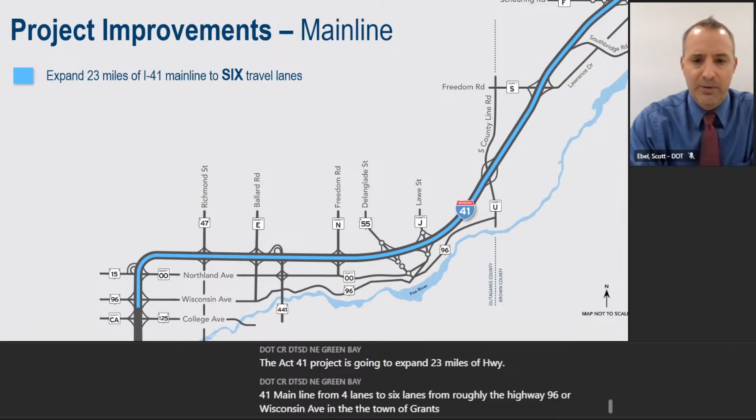I'll start by doing an overview of the I-41 project, of what's involved, and then continue into the updates. The I-41 project is going to expand 23 miles of I-41 main line from 4 lanes to 6 lanes, from roughly the Highway 96 or Wisconsin Avenue in the town of Grand Chute or City of Appleton area up through County Highway F or Scheuring Road in the town of Lawrence, City of De Pere area.

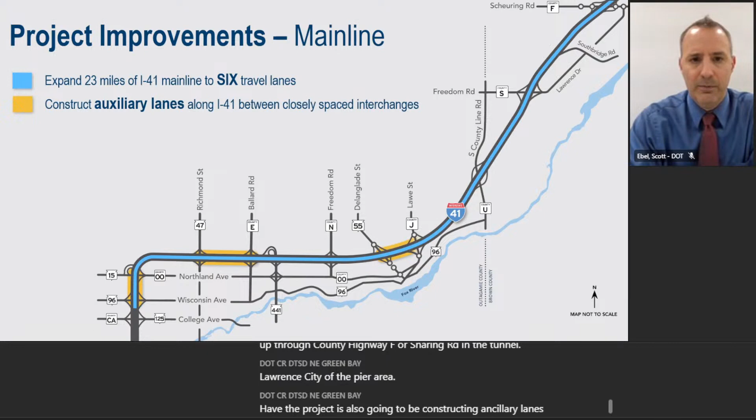The project is also going to be constructing auxiliary lanes along I-41 between most of the closely spaced interchanges that exist along the corridor. We'll also be constructing a collector distributor system of roadways between County E or Ballard Road and the 41-441 system interchange area.

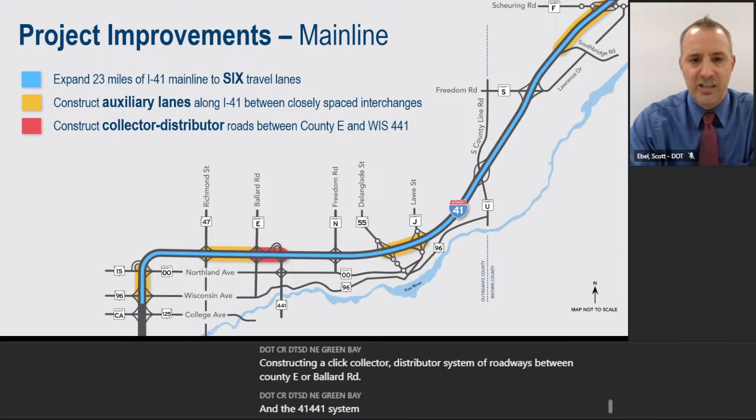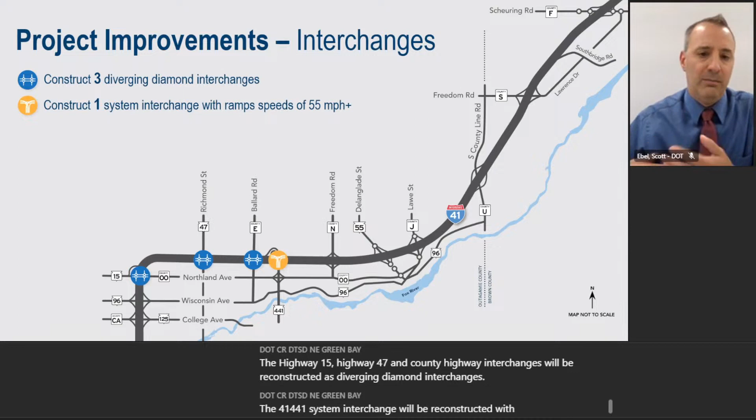The project will also be doing work at all of the interchanges along the corridor. As part of the project, most of these interchanges will be reconstructed. The Highway 15, Highway 47, and County Highway E interchanges will be reconstructed as diverging diamond interchanges. The 41-441 system interchange will be reconstructed with higher speed maneuver flyover type ramp movements.

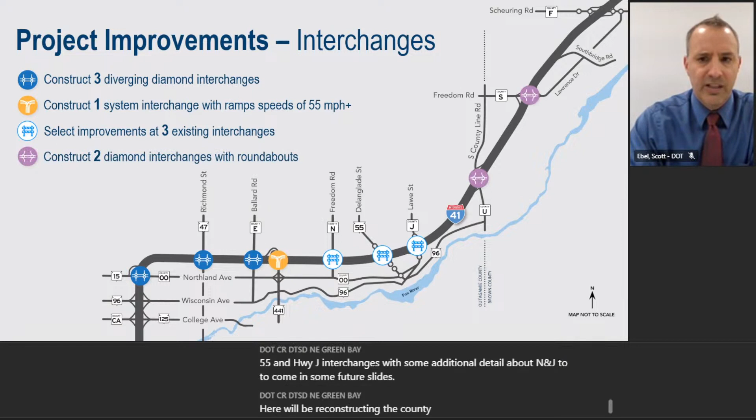We will be making a little bit more select improvements at the Highway N, Highway 55, and Highway J interchanges, with some additional detail about N and J to come in some future slides here. We'll be reconstructing the County U interchange and the County Highway S interchange as roundabout interchanges. And we will be constructing a brand new interchange near Southbridge Road in coordination with Brown County and their Southern Bridge Connection corridor.

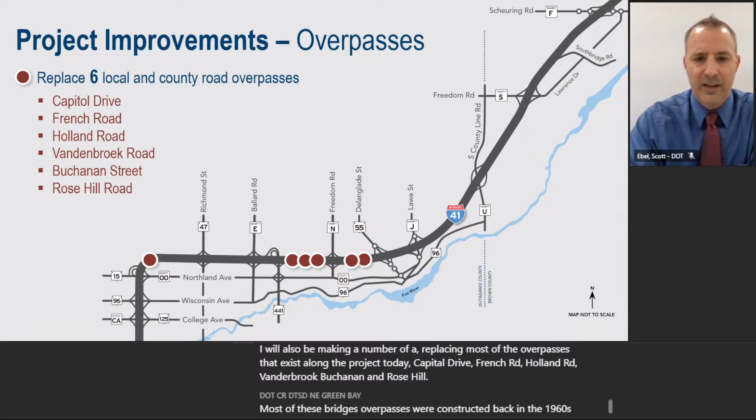We'll also be replacing most of the overpasses that exist along the project today: Capitol Drive, French Road, Holland Road, Vandenbroek, Buchanan, and Rose Hill. Most of these bridge overpasses were constructed back in the 1960s. They've got things like piers along the shoulders that we need to get out of the way in order to reconstruct the main line of the highway.

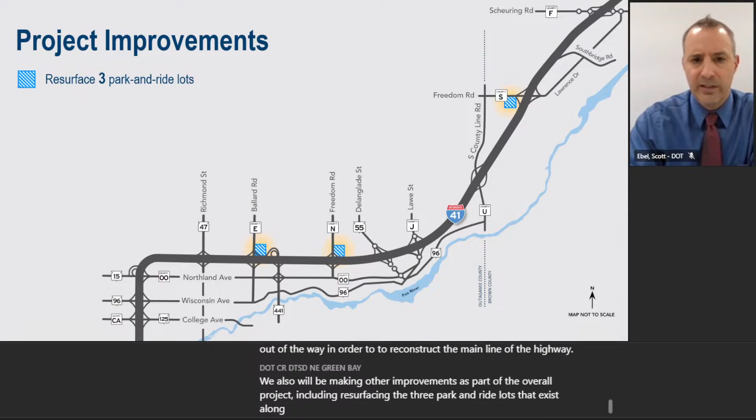We also will be making other improvements as part of the overall project, including resurfacing the 3 park and ride lots that exist along the corridor at County Highway E, County Highway N, and County Highway S, and constructing a new salt shed in the area of the Outagamie County Highway Department campus, near Holland Road and 441.

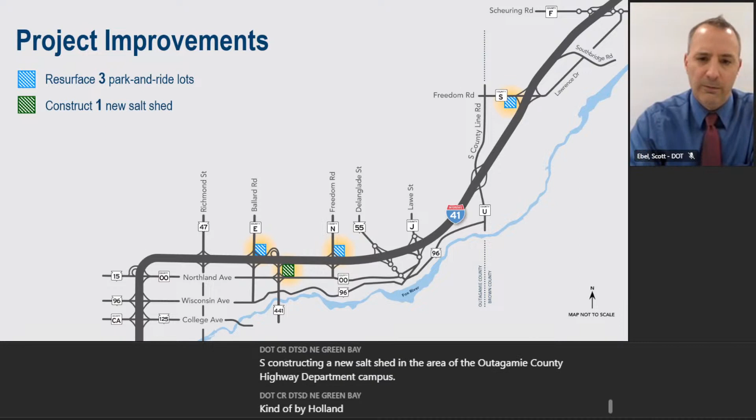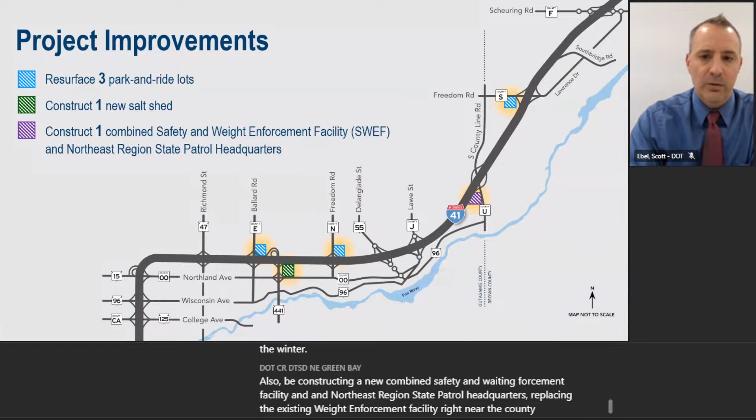Additional lanes of pavement, predominantly in Outagamie County, require additional salt capacity in order to treat during the winter. We'll also be constructing a new combined safety and weight enforcement facility and Northeast Region State Patrol headquarters, replacing the existing weight enforcement facility right near the County Highway U interchange.

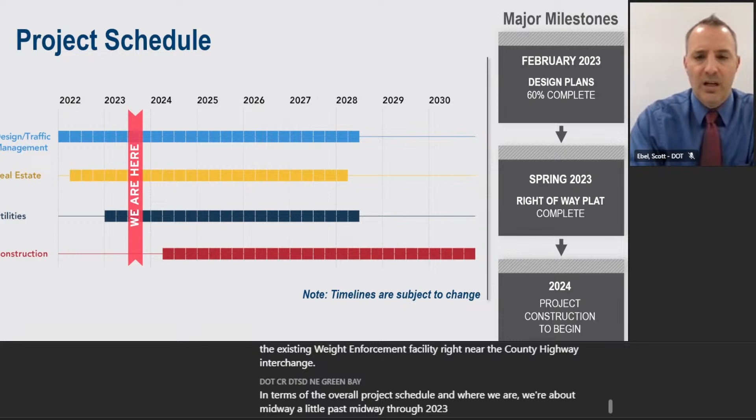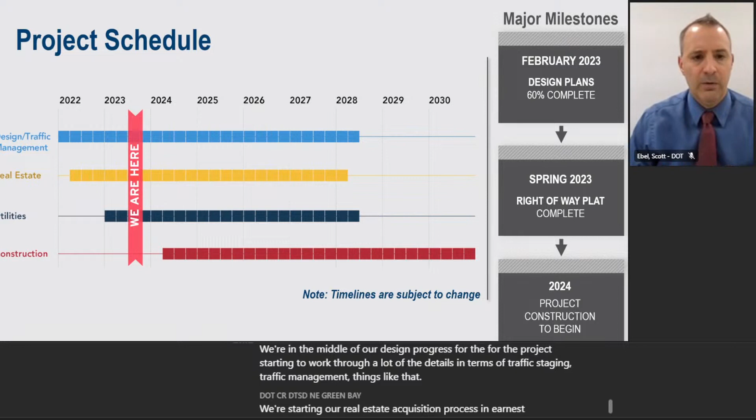In terms of the overall project schedule and where we are, we're about midway or a little past midway through 2023. We're in the middle of our design process for the project, starting to work through a lot of the details in terms of traffic staging and traffic management. We're starting our real estate acquisition process in earnest right now, and we've got utility coordination beginning for our earliest work. Construction is slated to begin in 2024, and I'll have additional detail on that in a future slide.

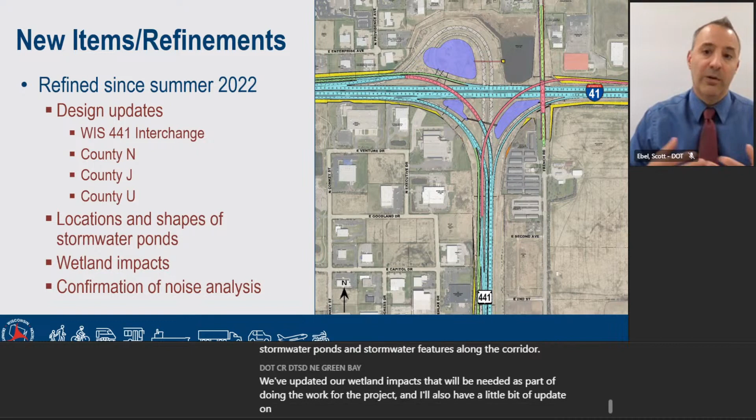I want to talk through some of the refinements and design changes made on the project since we were out here last summer. Since then, we've made some refinements to the 441-41 system interchange, added some additional work at the County N and County J interchanges, and made changes at the County U interchange. We've identified locations for most of our stormwater ponds and features along the corridor, updated our wetland impact estimates, and I'll also have a bit of an update on our noise analysis since last year's meeting.

At the 441 system interchange, we've made updates to lower costs and reduce right-of-way impacts by eliminating a bridge, eliminating or lowering some retaining walls, and eliminating some larger fills that were part of the original layout presented last year. Mostly this was done by eliminating a braided ramp configuration along southbound 441.

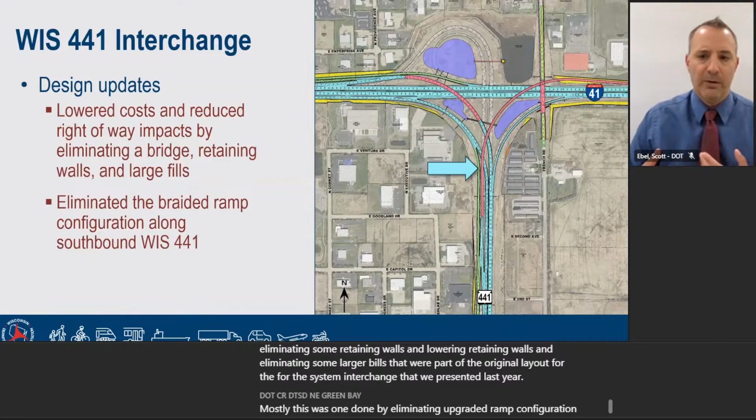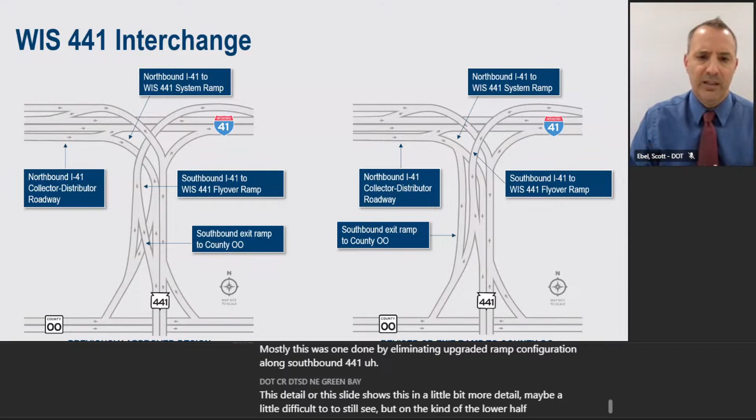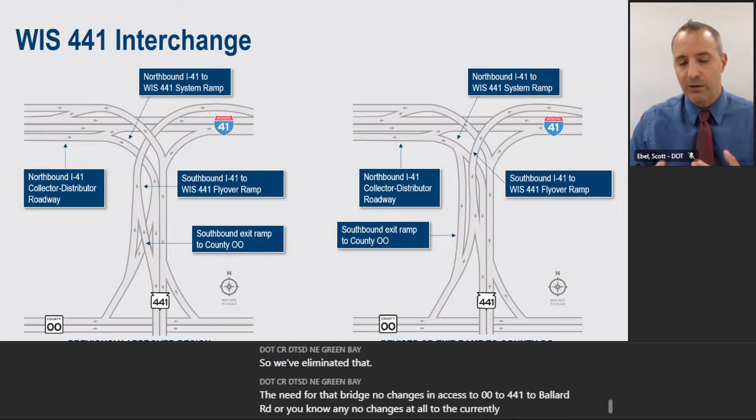This slide shows it in a bit more detail. On the lower half of the screen, where we have the southbound exit ramp to County OO, the previously shown design had a crisscrossing of ramps between the access to OO and the access to 441. We no longer need that crisscross based on other changes we were able to make, so we've eliminated the need for that bridge. There are no changes in access to OO, 441, or Ballard Road, and no changes to the currently existing local access as part of this change — it's really just a cost-saving feature.

We've also made updates to the plans for County Highway N to help future-proof and address future operations through that interchange area. This includes adding dual left turn lanes for the exit ramps from 41 onto County Highway N, and additional left turn capacity along County Highway N itself, including across the bridge. There will be some bridge rehab work and an increase in pavement area. Since we're touching a number of areas for that work, we're going to replace the existing pavement in that section so we don't end up with a pavement maintenance nightmare from mismatched vintages in the future.

A similar change is happening at County Highway J, where we're making improvements to increase the capacity of the roundabouts out there today to handle the oversized, overweight, larger freight vehicles that regularly travel this corridor. We're also making a few grade changes, which will result in new pavement being constructed as part of the project.

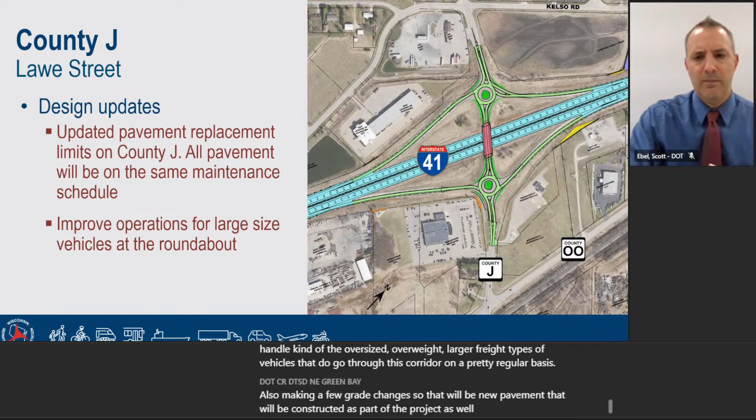We've also identified additional stormwater ponds since our initial environmental phase of the project, now identifying up to 22 stormwater pond locations based on additional design work and drainage patterns, in order to meet the stormwater quality standards required for our permitting with the Wisconsin DNR. Some of these ponds may end up being eliminated, but we don't anticipate needing more than 22. We're continuing to work through details on the exact locations and configurations of the ponds with the Wisconsin DNR.

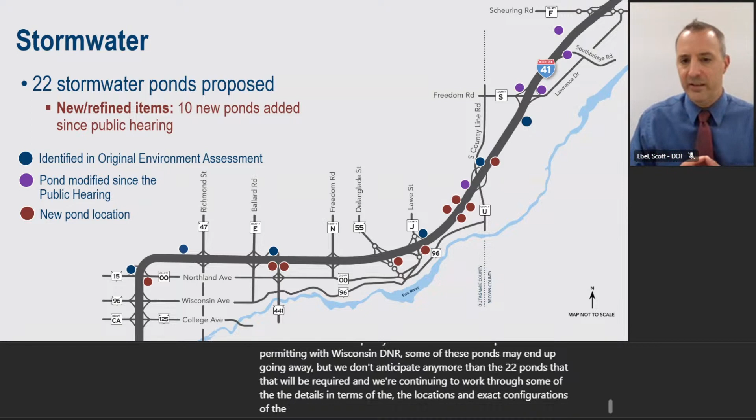We've also made some updates to our anticipated wetlands that would be impacted as part of the project. During the environmental phase, we'd identified 37 acres of permanent impact and 14 acres of temporary impact. Based on design updates, we now anticipate up to 76 acres of permanent impact with 7.5 acres of temporary impact. We are working with Wisconsin DNR and Army Corps of Engineers to try to minimize these impacts as best as we can.

A lot of these impacts are related to changes in ditch grades throughout the corridor that we've made, just trying to get the water to flow where it needs to go. Some have been for stormwater treatment and water quality standards, trying to meet that with our stormwater ponds. And also some are due to improvements for safety and traffic operations at crossroads and interchanges, or small amounts of additional work we're doing at some underpass locations with local design coordination.

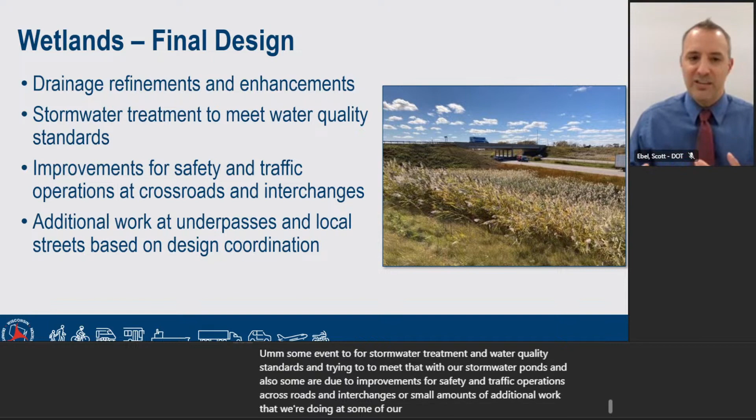This is a little bit of a snapshot of the 15 interchange, previous design versus the current or updated design, just to give a flavor of the types of changes to wetland impacts we're discussing here. Based on other design constraints, we needed to move the stormwater pond location, which resulted in some additional impacts. We identified the need for an additional pond, which resulted in some additional impacts. There were also additional ditch grading impacts that were originally anticipated to be temporary, but were later confirmed to need to be permanent, mostly based on a change in grade.

An existing ditch that gets impacted, or existing wetland ditch that gets impacted and goes back in at that same elevation, may not be a permanent impact. But oftentimes if we need to raise the elevation of that ditch in order to get water to flow where we need it to go for treatment or other things, that will result in a permanent impact.

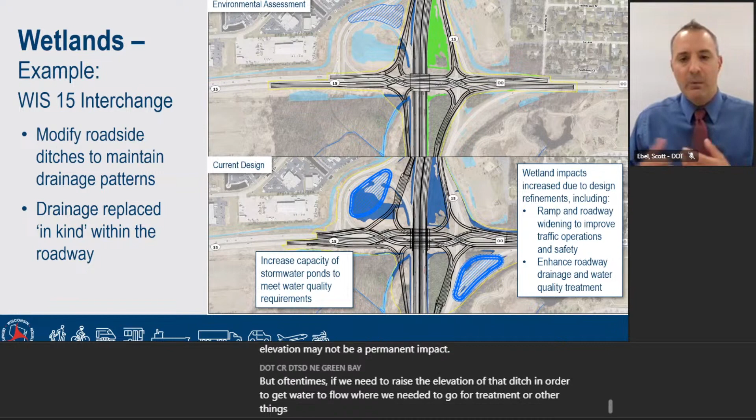Also, a little bit of an update on our noise analysis. We're currently completing a confirmation of the noise analysis that was done during the environmental assessment phase, optimizing the details of the barriers, making minor adjustments to accommodate specific site conditions, evaluating options for cost efficiency, things like that. And also just updates from the design overall has had minor changes, so we wanted to make sure that's all up to date.

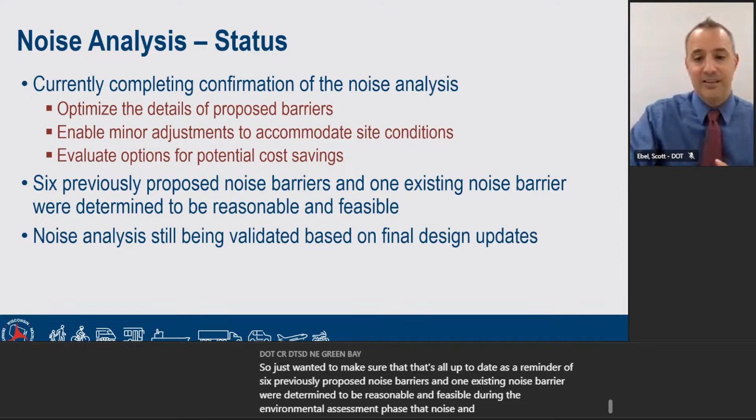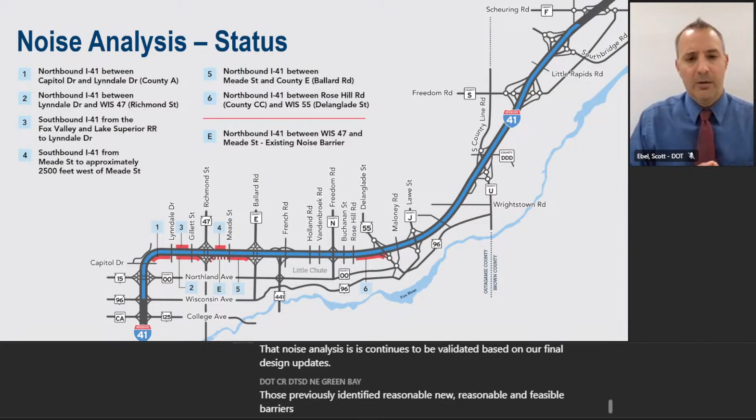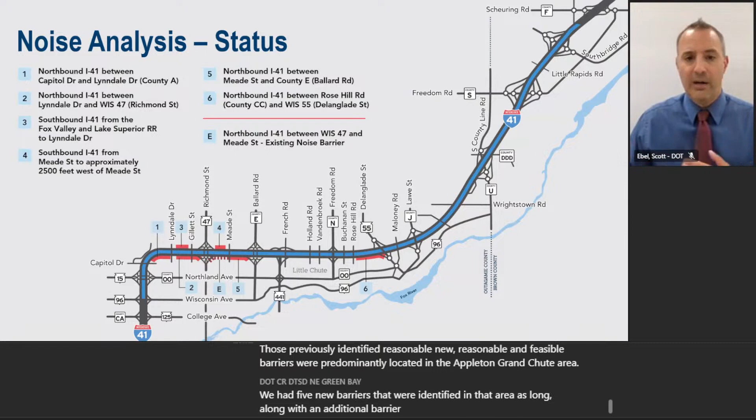As a reminder, 6 previously proposed noise barriers and 1 existing noise barrier were determined to be reasonable and feasible during the environmental assessment phase. That noise analysis continues to be validated based on our final design updates. Those previously identified new reasonable and feasible barriers were predominantly located in the Appleton and Grand Chute area. We had 5 new barriers identified in that area, along with an additional barrier closer to Highway 55 on the south side of 41.

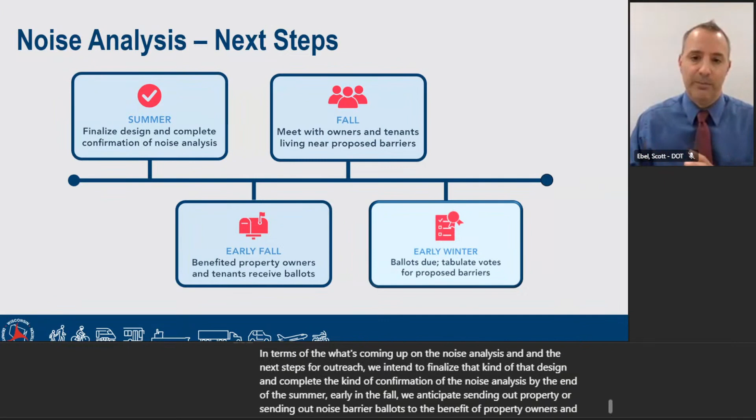In terms of what's coming up on the noise analysis and the next steps for outreach, we intend to finalize that design and complete the confirmation of the noise analysis by the end of the summer. Early in the fall, we anticipate sending out noise barrier ballots to the benefited property owners and receptors in the area in order to vote on and confirm whether or not they want the barrier to be constructed as part of the project.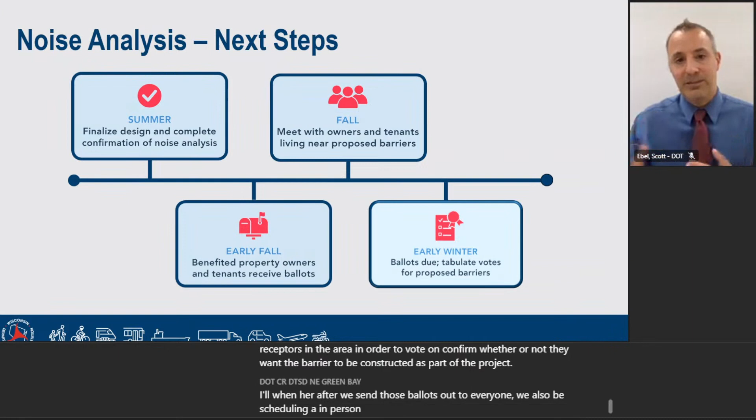When or after we send those ballots out to everyone, we'll also be scheduling in-person meetings to go through the ballot information and the updated noise analysis results, really walk through that in more detail. Then early in the winter, we anticipate the ballots being due, tabulating the votes for the proposed barriers before they can be 100% included as part of the project.

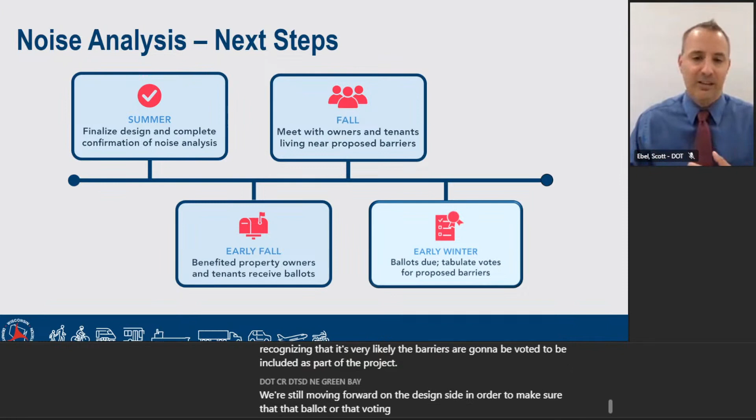Recognizing that it's very likely these barriers are going to be voted to be included as part of the project, we're still moving forward on the design side to make sure that ballot or voting process isn't going to be any kind of hold up. But that voting process is required as part of our noise policy.

We also have additional noise resources available on the project website. Encourage you to go out and look at that as you're able. This is an area of the website that, as we move through that voting process, we will continue to update with new information.

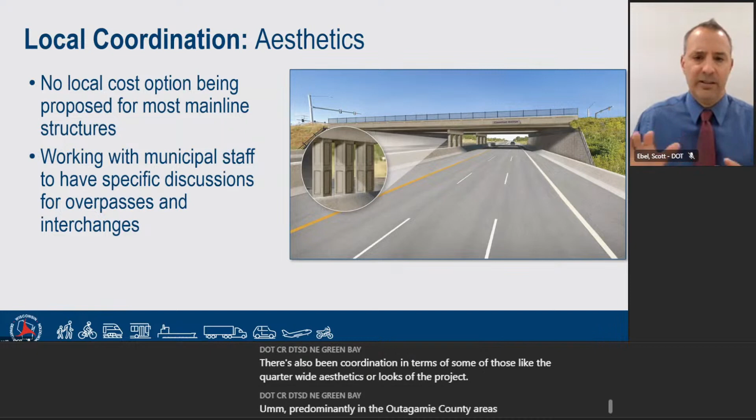There's also been coordination in terms of some of the corridor-wide aesthetics or looks of the project, predominantly in the Outagamie County areas, but also extending a little bit into the Brown County area. We've been working with various municipal staff in order to come up with a no local cost option to be used for most of our mainline overpass structures.

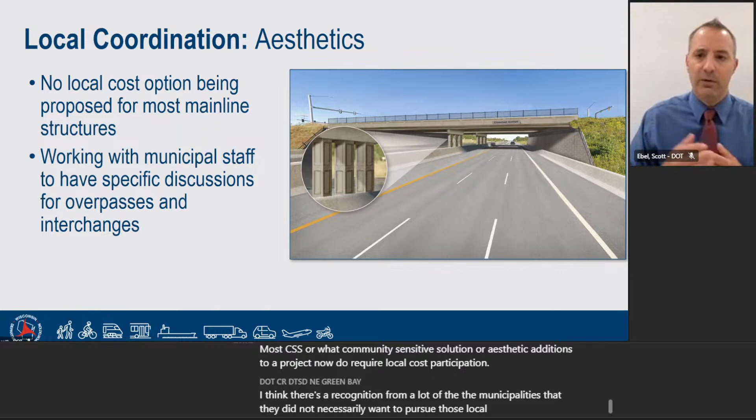There's a rendering of that on the screen right now. I want to stress this is something that will involve no local cost. Most CSS, or community sensitive solution, or aesthetic additions to a project now do require local cost participation. I think there's a recognition from a lot of the municipalities that they did not necessarily want to pursue those local costs for most of the project or most of the locations along the corridor.

We do have one set of bridges at the South Connector interchange. This would be the new interchange constructed just south of Scheuring Road in the De Pere Lawrence areas. This bridge is very close to the previous US 41 project, so the community wanted an aesthetic similar to that previous work, so there's a slightly different look here for this bridge, which is being done with local cost participation.

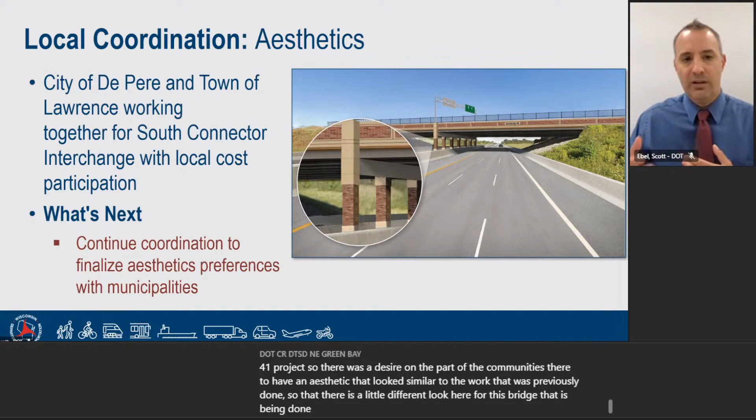On the stormwater side, we're adding a number of additional ponds as part of the project. We continue to coordinate with municipalities on our drainage designs and ponds, and in a number of locations we're proposing a new pond where municipal water would also be flowing through. Oftentimes these ponds are an opportunity for joint benefit, both for our permitting and for that municipality's permitting with the Wisconsin DNR and their stormwater requirements.

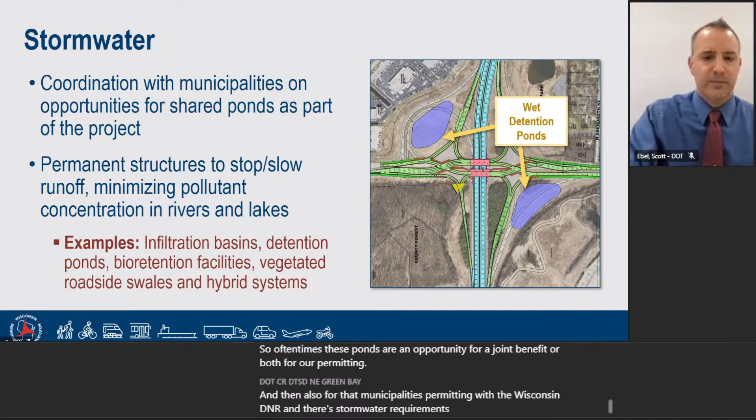Our real estate process is continuing in earnest. Early buyouts were completed as part of the environmental phase of the project. The right-of-way plats are complete in some locations, and others will be completed through the end of summer and into fall. We've got approximately 300 parcels being impacted as part of the project, and that acquisition process is really starting to kick up.

We've got appraisals that have been in the works. Some property owners along the corridor have already been contacted with appraisal information, and we may start to see offers come to them very soon. But this is also a process that's going to take a couple of years to entirely play out, just because of the large number of parcels required.

Construction will kind of lead, and it won't all start right away - it'll be a year by year thing. So the real estate will kind of follow suit. It'll be a couple year process to get all the real estate acquired for the project.

Transportation management planning involves coordinating those traffic impacts with stakeholders along the corridor, including local road operations, county highway, local planning and public works departments, transit, bike and pedestrian outreach, county parks, school districts, chambers of commerce, area schools, and busing. We want to coordinate the impacts of the traffic we expect throughout construction with these area stakeholders.

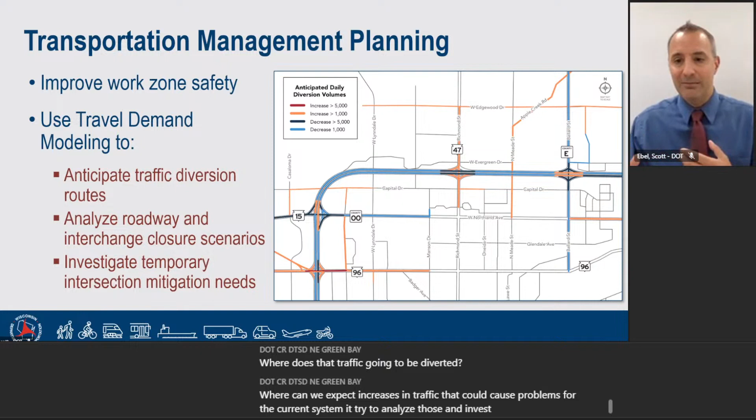One of the tools we use is our travel demand model, basically a model of all the traffic in the area that we can use to analyze scenarios - say, if we need to shut down the 47 interchange, where is that traffic going to be diverted, and can we expect increases in traffic that could cause problems for the current system? We try to analyze those and investigate any need for temporary mitigation.

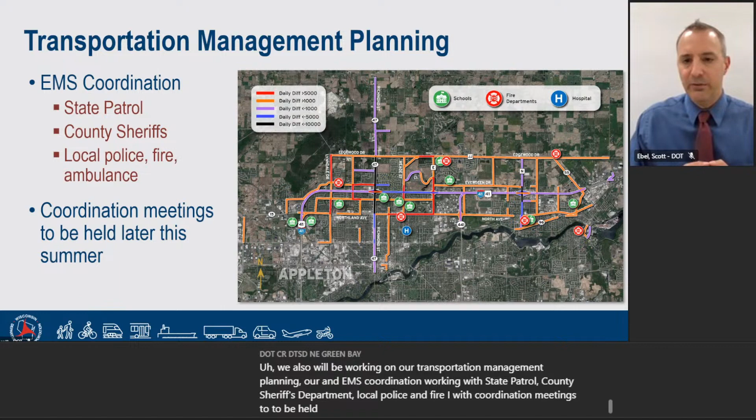We'll also be working on transportation management planning and EMS coordination, working with State Patrol, County Sheriff's Department, and local police and fire, with coordination meetings to be held with those groups prior to construction, and especially leading into construction with incident management for the project. We'll be organizing incident responder stakeholder meetings during construction.

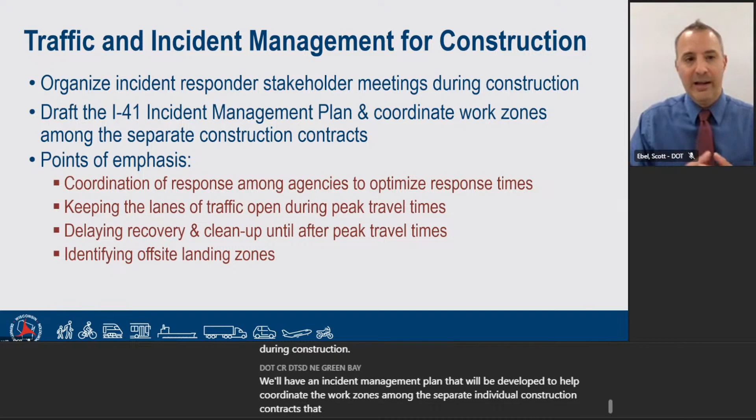We'll have an incident management plan developed to help coordinate the work zones among the separate individual construction contracts going on, with points of emphasis to coordinate response among the agencies to optimize response times and keep lanes of traffic open, especially during peak travel times. When there's an incident, it's to everyone's benefit to clear that work zone as quickly as possible, with additional cleanup happening during off-peak travel times when there's less traffic, because it's really about preventing secondary or tertiary incidents and helping everybody move through the corridor safely.

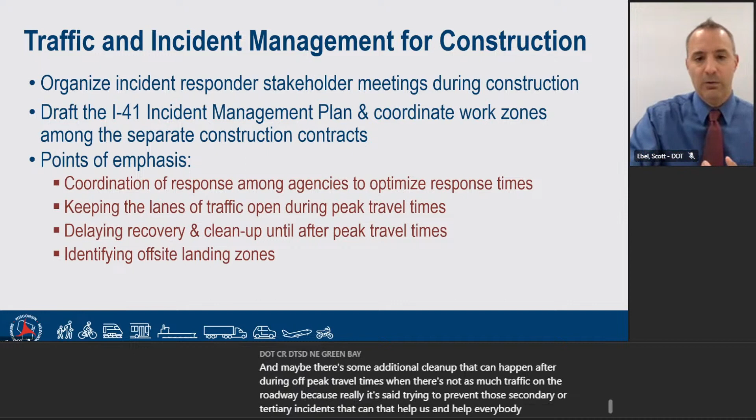That incident responder effort is going to continue this fall, leading up into construction. Once construction starts, there will be regular after-action reviews, monthly responder meetings, and incident management plan updates as needed.

Other activities that will be going on through 2023: ongoing design, ongoing field work, investigations, soil borings taking place right now. Many of you may have seen drums along the median of I-41. Notice the median has recently been mowed. We're doing soil borings in the median this summer to characterize the material that's there. Also doing additional archaeological work, mostly completed already this year, and routine survey updates, utility survey updates, things like that.

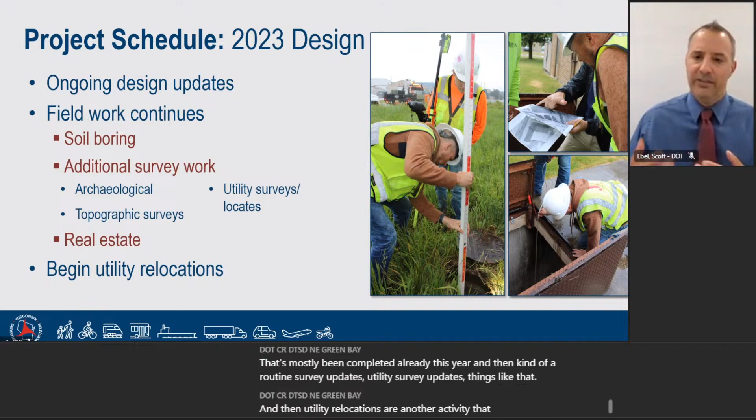And then utility relocations are another activity we anticipate to start later this year.

Looking ahead to our 2024 priority projects, you'll start to see our focus shift. Next year we're going to let a project for Capitol Drive and the 15 interchange, one of the earliest priorities. Also Rose Hill Road, or County Highway CC, the bridge along I-41 that was struck last year around August, which has had a lane restriction or lane tightening up on top. So we want to get to that bridge as quickly as we can once construction starts.

Later in 2024, the County Highway N interchange will become a priority, and the early fill and Southbridge connector frontage road project, to lay the foundation for the new Southbridge interchange, will be the next priority. Also replacing the weight enforcement facility and constructing the new Northeast Region State Patrol headquarters. These are the projects we anticipate for 2024.

The Capitol Drive overpass and Rose Hill Road overpass are anticipated to take place mostly in spring, early summer. The Highway 15/OO interchange work could potentially start later into 2024, but we expect that to mostly go into 2025. The County N interchange is anticipated for later in the summer and fall of 2024, and the Southbridge early fill contract work for 2024 through 2025. The weight enforcement facility we anticipate will be a 2-year project, constructing both the building and the new pavement area around it.

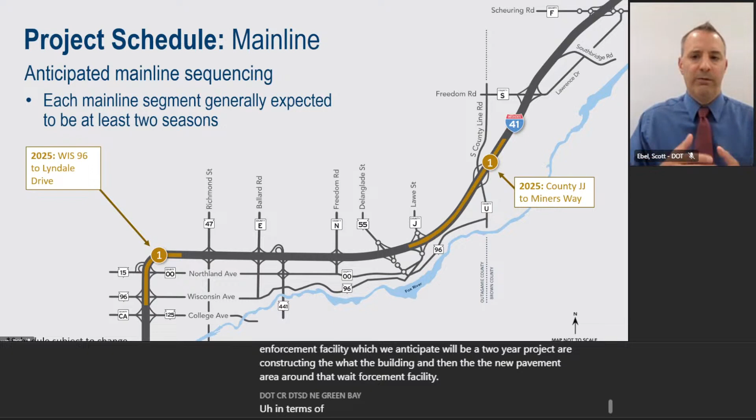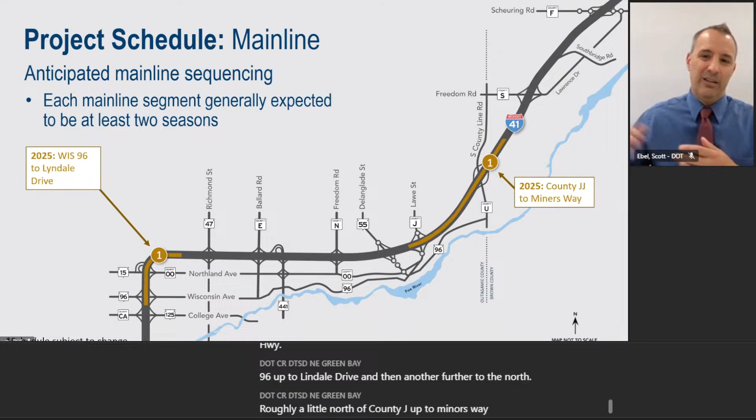In terms of overall mainline highway work, we don't expect that to commence until 2025. The current plan is to start 2 segments of mainline: one furthest south from roughly Highway 96 up to Lyndale Drive, and another further north from roughly a little north of County JJ up to Miners Way, including the area in front of the weight enforcement facility at County Highway U.

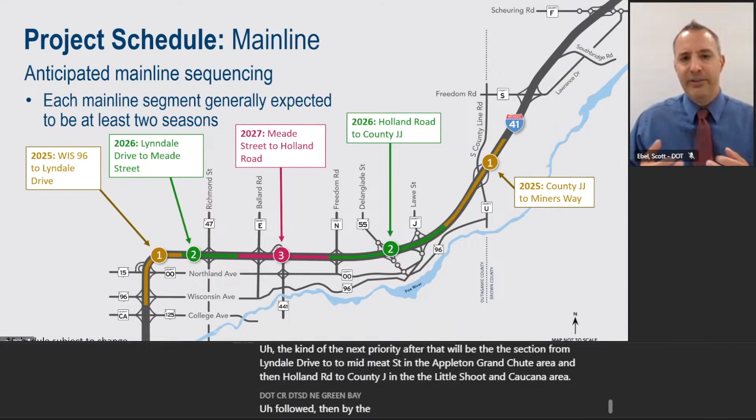The next priority after that will be the section from Lyndale Drive to Meade Street in the Appleton Grand Chute area, and Holland Road to County JJ in the Little Chute and Kaukauna area. Followed by the Meade Street to Holland Road area, which also contains the 441 system interchange -- we expect that to be at least a 2 or 3 year window of construction. And then lastly, from Miners Way up to County Highway F.

This is subject to change. We may break some of these pieces into smaller pieces of work earlier. Also want to stress that all of these mainline contracts are going to be multi-year projects, at least 2 seasons of work. We're not going to totally finish the work from 96 to Lyndale before we start Lyndale to Meade. There's going to be overlapping work where you'll see work happening on multiple projects at the same time.

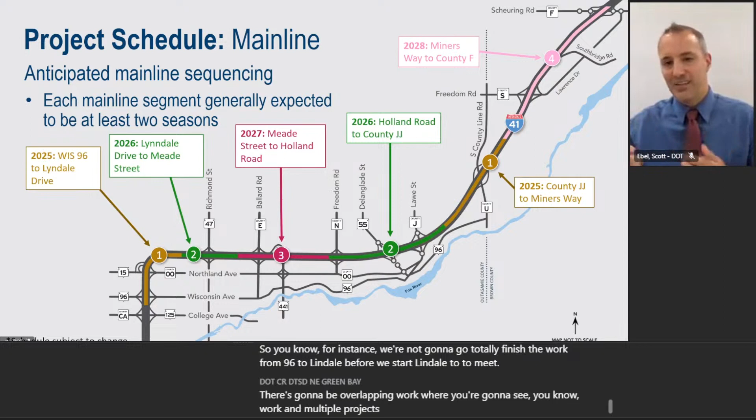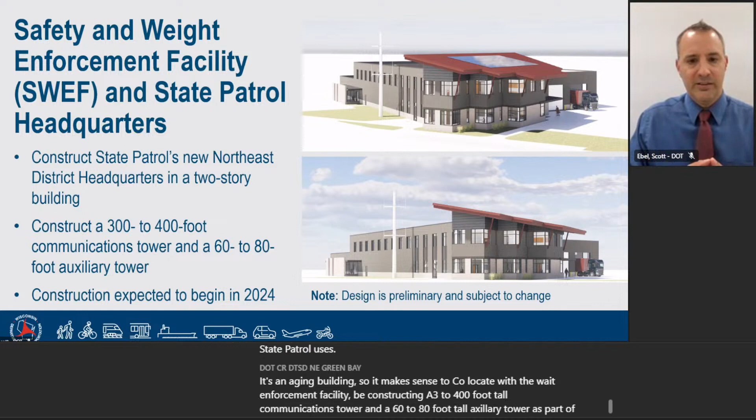The weight enforcement facility and new State Patrol headquarters will be replacing the existing Fond du Lac Post facility that State Patrol uses. It's an aging building, so it makes sense to co-locate with the weight enforcement facility. We'll be constructing a 300 to 400 foot tall communications tower and a 60 to 80 foot tall auxiliary tower as part of this project, expected to begin in 2024 as well.

Some other department work taking place in 2023 and 2024: this year we've got a bridge preventative maintenance project along 441, as well as a pavement rehabilitation project doing concrete repair work along 441 between US 10 and 41, near the north junction with 41. We also have a bridge replacement project along Highway 125, or College Avenue, between I-41 and Bluemound, and a County OO improvement project, a local program project, along County Highway OO between 441 and French Road.

In 2024, there'll also be adjacent work to the 41 project along I-41 further south between Breezewood Lane and Highway 15, as well as some work along 96 from Claribel Street to County JJ doing resurfacing, and some utility relocation work from Bluemound Road to Badger Avenue, again along Highway 96 or Wisconsin Avenue, in anticipation of a department project to be done in 2026.

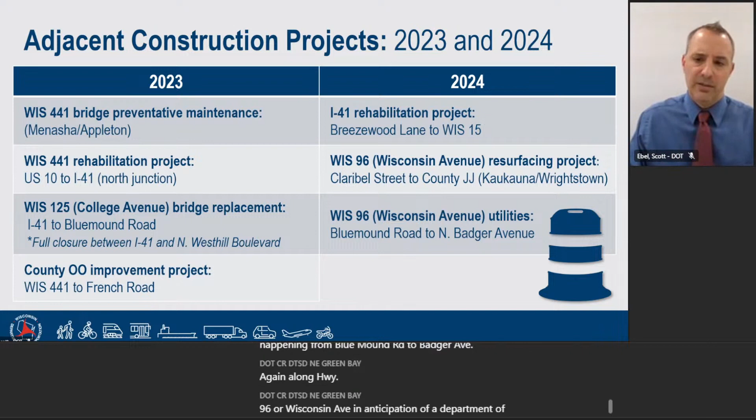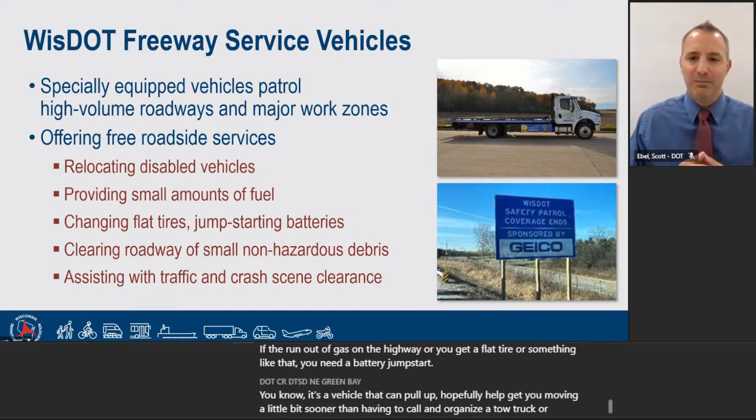We also have our freeway service vehicles roaming the project area right now. These are vehicles sponsored by Geico—basically tow trucks especially equipped to help clear the roadway as quickly as possible. If you run out of gas on the highway, get a flat tire, or need a battery jump start, this vehicle can pull up and hopefully get you moving sooner than having to call and organize a tow truck. We try to get you off the roadway as quickly as possible to prevent those secondary incidents that can happen even when there's just a routine car pulled over on the side of the road.

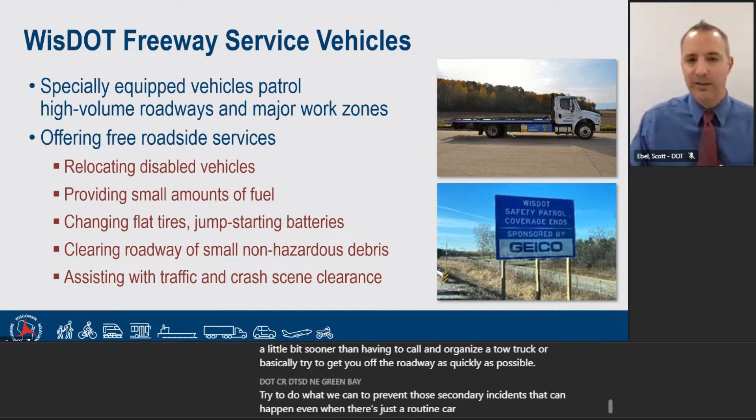We also plan to continue our outreach. We want to be the most trustworthy and credible source of information about the project to the communities, and make sure we're seeking your input at project milestones and throughout the life of the project.

We want to keep you informed through social media on Facebook or Twitter, or through the project website. We definitely encourage everyone to visit the project website—it's got a very nice, clean user interface compared to the more standard project websites you may have seen on other projects. There's a lot of great information about the project there, and you can submit any comments or questions you have. We'll try to get back to you within a few days of any questions submitted. You can also sign up for project emails if you're not already on our email invite list.

We also have business outreach that we're going to start kicking up this fall, ahead of some of our bigger impacts next year with the overpass work at Capitol and CC, and especially at County Highway N, which will be our first interchange closure. We're trying to identify specific business needs, since we know businesses in particular can be heavily affected when we start to close roads and interchanges. We don't want to sugarcoat that there will be effects, but we want to work with businesses to help manage those impacts as best we can. We have a 'we're in this together' business coordination website we encourage businesses to visit for tips, tools, and resources during construction. As construction starts, project staff will help businesses answer questions about what's coming in terms of traffic impacts, and where temporary signs can be placed to help inform customers about access to businesses.

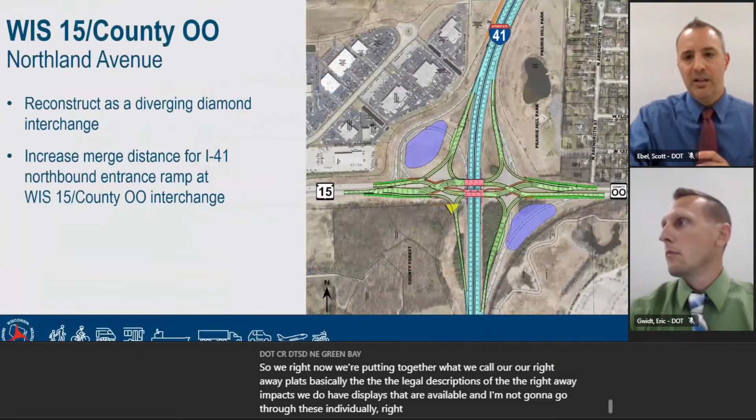Right now we're putting together what we call our right-of-way plats, basically the legal descriptions of the right-of-way impacts. We do have displays available—I'm not going to go through these individually right now, but we do have real estate impacts that are part of the project available. These displays will be put up on our project website that can be viewed by anyone who jumps onto the website to take a look.

At the more granular level, we're putting together these right-of-way plats, identifying all the specific parcel impacts, and where we have these impacts, Wisconsin DOT or consultants hired by Wisconsin DOT will be contacting property owners to go through the process of appraising that impact, what that is, and then getting an offer for that impacted parcel. So there is a very large effort related to the real estate impacts and working with impacted property owners through that real estate acquisition process.

If you have specific questions about the real estate process, I definitely encourage you to attend the in-person meetings we have either tomorrow or Thursday. We will have dedicated real estate staff at those meetings who can answer a lot of the specific questions about the real estate process, or follow up with us after the meeting tonight, and we can have somebody get in touch with you.

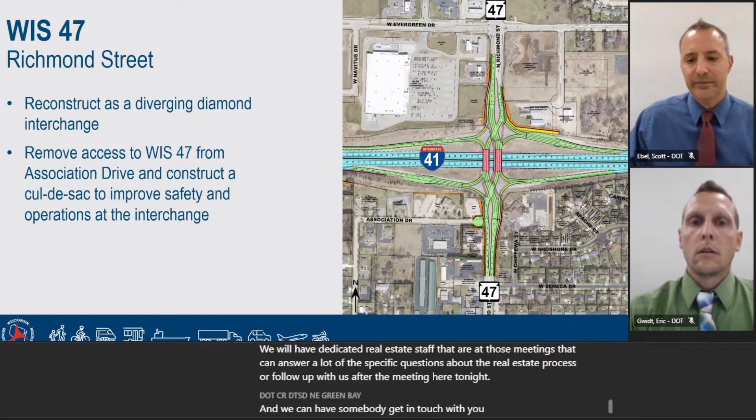Next question: at what point in the project will the noise barriers be put in place? As I said, we need to go through this voting process to confirm that the noise barriers are wanted by the neighborhoods that would be benefiting. Anticipating that the neighborhoods are all going to vote for the barriers to be put in place, they will be constructed as part of the overall roadway work.

Typically, how we'll be constructing the main line of 41 is flip traffic over to one side of the roadway, construct the other side, and then flip traffic back and construct that side. So basically when one side of the roadway is down for construction, that's when we'd typically anticipate the noise barriers to be constructed as part of that same closure. You don't have traffic on that side, so the contractor can get in there and do that work a lot easier. We typically just include that as part of the roadway work.

Who is covering the cost of the noise barriers? The cost of the noise barriers is just covered as part of the overall project costs, no different than any other roadway or bridge cost as part of the project.

Next question, what exactly is happening with the Capitol Drive Bridge, and how will the elevation change into Rifle Range Road? Thanks for the info and very informative.

Sure, I can answer that real quickly. We will have a display up on the website that shows Capitol Drive, but the Capitol Drive Bridge will be replaced. It will need to get longer because I-41 underneath is going to be wider, with additional lanes underneath. Because it's getting longer, it also needs to get a little bit higher, so there will be some raising of Capitol Drive on the approach to the bridge.

We are otherwise not planning to change the access to Rifle Range Road from Capitol Drive. That intersection will basically be very similar to what it is today. When the project is done, it will just be a little bit higher.

I think we kind of answered this one, but what is the timeline for the new sound barriers? Maybe just looking for a year or timeline.

Sure, yeah. So the time frame for the noise barriers is really going to be when that section of mainline 41 is also being worked on. As I said, that first priority for mainline is going to be that work from 96 to Lindale. That section north of Capitol Drive on the northbound direction will have a new noise barrier, so you would see that being constructed as part of that project. And as we go along mainline, wherever we have that noise barrier, it will be part of that mainline work.

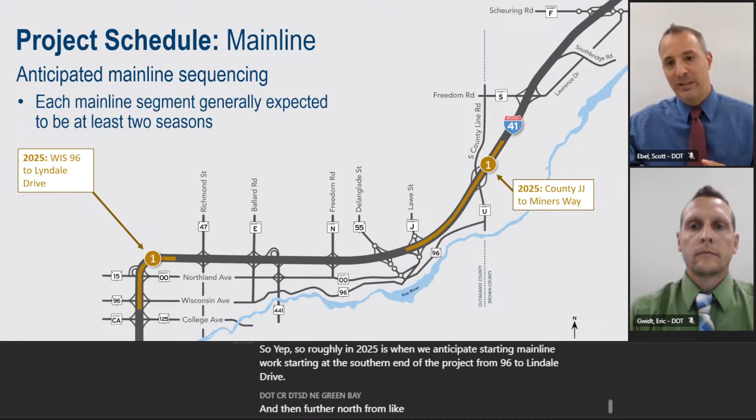Roughly in 2025 is when we anticipate starting mainline work, starting at the southern end of the project from 96 to Lindale Drive, and then further north from a little bit north of County J, roughly around County JJ, up to Miners Way.

Next question: will 41 ever be shut down for bridge overpass installations, etc.? And if so, how long — overnight, several hours? So just kind of how long do we think stuff like that would be?

There will need to be, in most cases, directional closures for things like bridge demolition, setting girders, and similar work. Sometimes we do have to have very temporary shutdowns of 41. A lot of that isn't going to be work we're doing during the day at all. During the day, we're pretty well committed to maintaining two lanes of traffic in each direction through peak hours. This work would be happening overnight or over a weekend. Recognizing how important and how much volume of traffic uses 41, we try to limit the need to close 41 itself, to the extent that we can.

There are a few questions in here that are property specific, and we'll reach out to those people individually to answer those at a smaller scale. So I'll skip to a couple other questions here.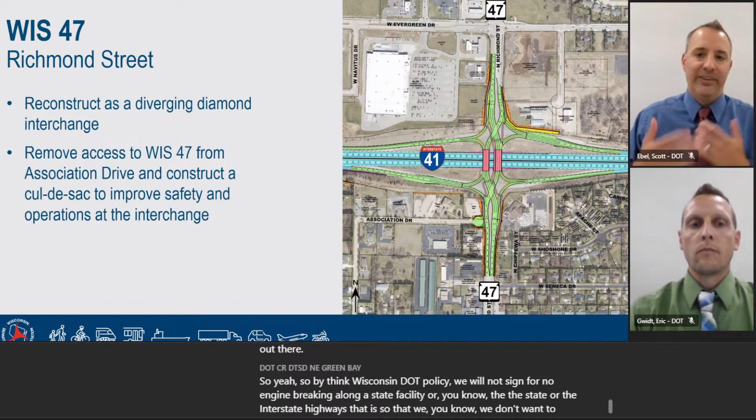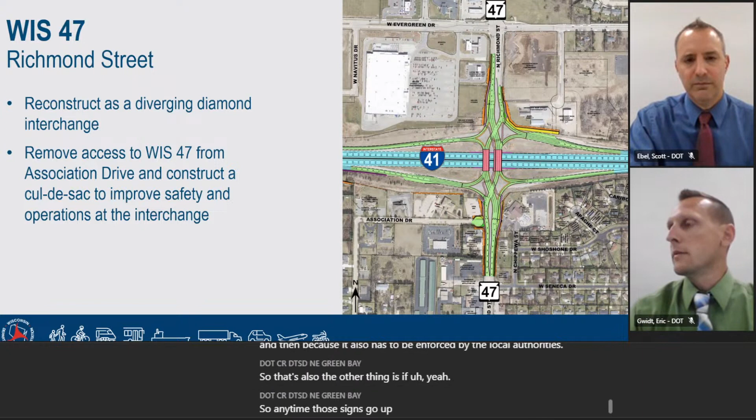Can engine braking be restricted in emergency situations to reduce noise? Not sure if this is where to ask the question, but thought I'd throw it out there. By Wisconsin DOT policy, we will not sign for no engine braking along a state facility or interstate highways. That is so we don't want to be the culpable partner if there's an incident and a truck does not engine brake—I think that's the reason for the policy. But that is the policy: we will not sign or do no-engine-braking signage along a state facility. It has to be passed by the local authorities, and it also has to be enforced by the local authorities. So anytime those signs go up, it has to go through those different avenues. But interstates and similar roads are exempt from that.

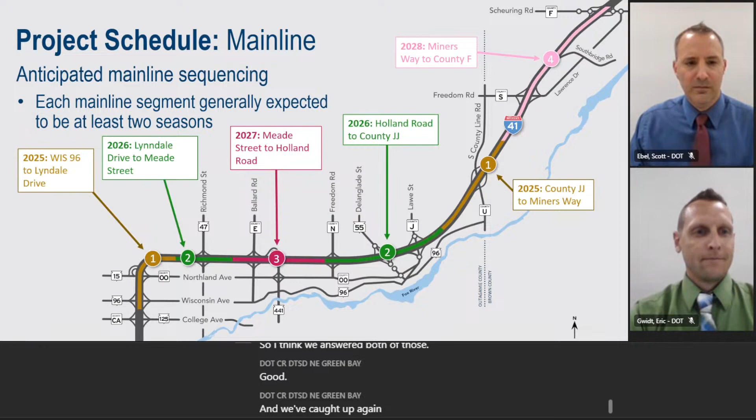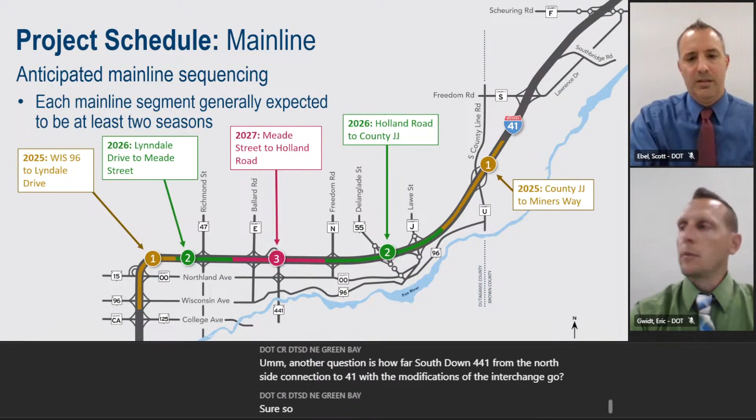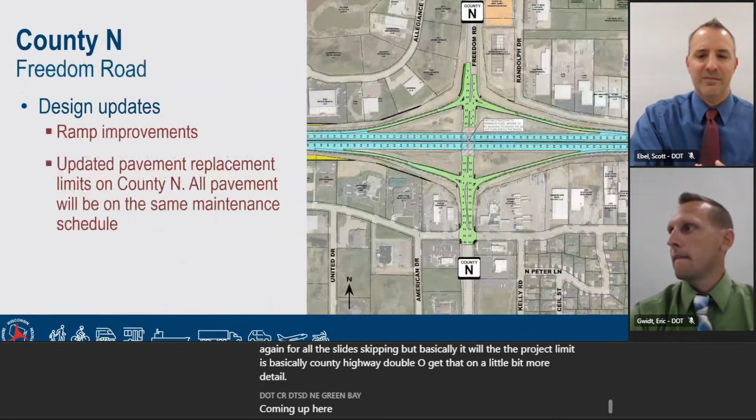Another question is, how far south down 441 from the north side connection to 41 will the modifications of the interchange go? Basically, the project limit is County Highway OO. We won't be doing any work along County Highway OO itself as part of the project, but we will be reconstructing the ramps on the north side of the interchange. We'll also be doing a little bit of bridge widening on the southbound bridge over OO, and a little bit of widening further south. But for the most part, County OO is the limit we're not doing much work beyond.

We don't have any new comments coming in.

There's one new response about the pedestrian bridge, saying they're glad it's not going away since their dogs use the bridge often. Thank you, yep.

Another one coming, I think.

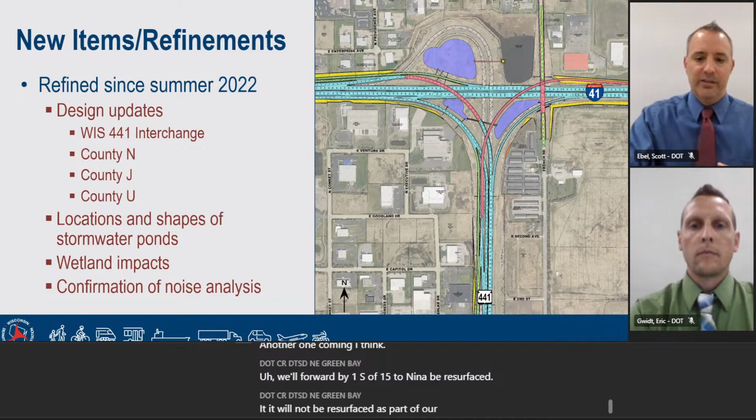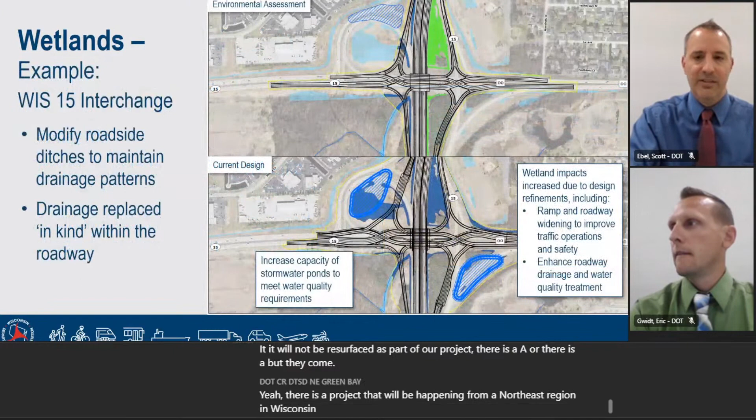Will 41 south of 15 to Neenah be resurfaced? It will not be resurfaced as part of our project. There is a project from the Northeast Region Wisconsin DOT that will be happening. It'll be a rehab project with bump repairs and bridge rehabs next year. That rehab work would go from roughly Breezewood Lane up to Highway 15, occurring in 2024. It's a pretty big job, but it's not associated under this 41 project umbrella—it's a separate DOT region project. It'll improve the pavement that's out there today, but won't involve any new reconstruction type of activity.

What is the plan for Rose Hill Bridge, height and lane width? Will there be a noise barrier? Let's answer that first one first. Rose Hill Road is being reconstructed. It's currently a 2-lane roadway and will remain a 2-lane roadway. There will be additional width on the bridge over I-41.

This extra width is to accommodate pedestrian or bike access that could connect to it in the future—we don't want that to be a choke point. It will be a transitional urban section through the approaches, constructing curb and gutter instead of the more rural ditch that's there now. It'll be a little bit wider up on CC, but for the most part similar to what's out there today. The bridge itself will be a little longer and a little higher because of the work on 41 below. Will there be a noise barrier between County N and Rose Hill?

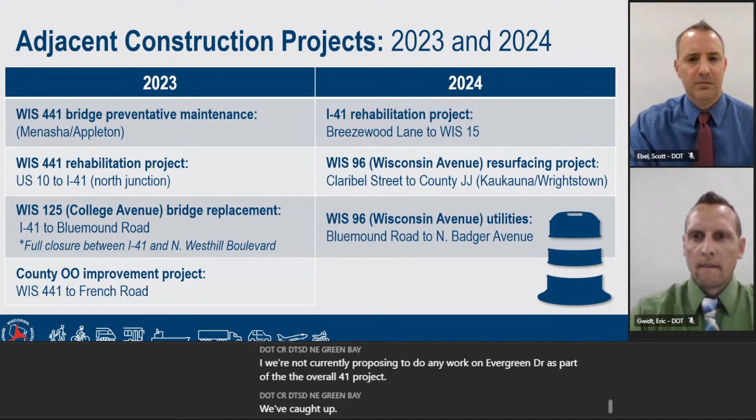Got a little more information on the rehab project—it'll run from April of next year through November of next year, pretty much all season, covering 9 miles of rehab work: fixing deteriorating concrete barrier, culverts, and polymer overlays of the bridges. So quite a bit of work, a pretty substantial amount, just a little more information on that bridge project south of this one.

Since the work is weather dependent, will the schedule likely be subject to change going forward? As we get into the details and construction starts, with anticipated ramp closures or weekend work, weather is always a factor and can change the plans. We try to account for that and build flex into the overall schedule for those expected delays. Since there'll be a lot of bridge and structure work, there will likely also be winter work, which is about the only thing you can really do in wintertime. So there will be work possibly 12 months out of the year, depending on the project and location, but mainly during the summer will be the busiest time.